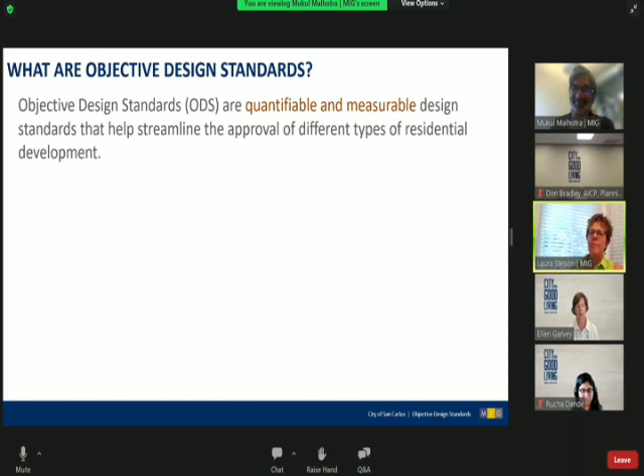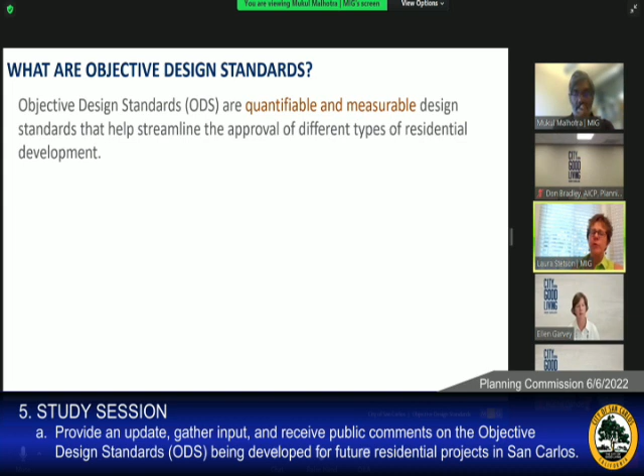So let's talk about what objective design standards are. You might scratch your head if you're a design professional or member of the public involved in design review, thinking how do you quantify and measure design? How do you describe a color, or how windows, roofs, or building materials are treated? That's a tall order, but the objective design standards will create a guide—more than guidelines, standards with some flexibility—for how planners and the public can review a project, and streamline the approval process for different types of residential development. The overarching goal the state is looking for is to create surety in the process of building residential development, because people need housing. There's a housing crisis, and this is one of many laws that has come forward to help address that.

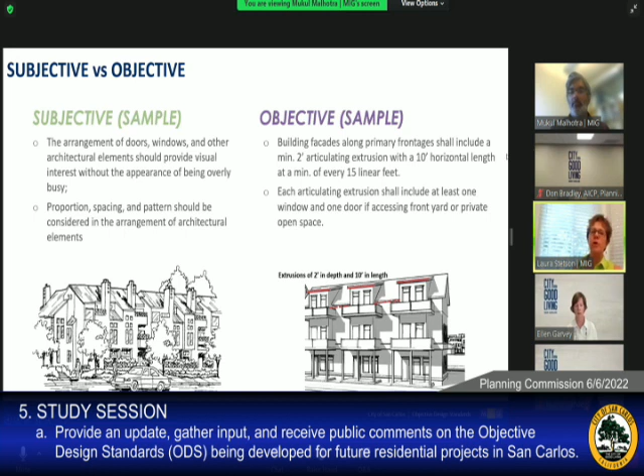It's hard to put objective criteria to design. You might have design guidelines today, like the sample on your left, that talk about the arrangement of doors and windows needing to create visual interest. But what does visual interest mean? It means different things depending on who you ask. If you take that type of standard and apply objective, measurable standards to it, you can see the example on the right—not saying you have to do exactly this, but here are minimum things you have to do to create, for example, articulation in a building facade.

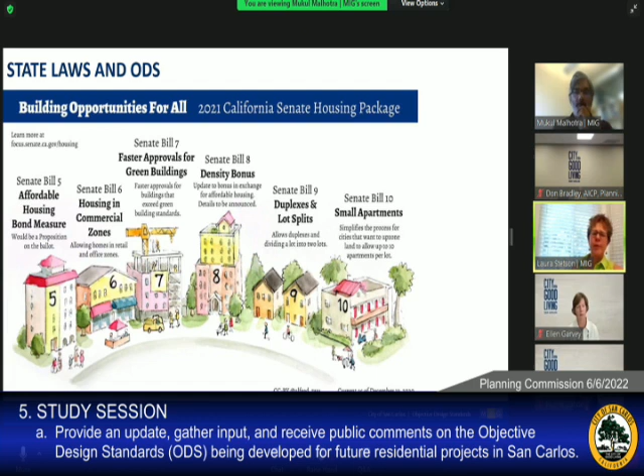I mentioned that there are a lot of state laws that are coming together to guide these objective design standards, one of which we'll talk about this evening is Senate Bill 9, SB 9, which addresses single family homes and the fact that you can now put more than one home on a lot in a single family neighborhood. But there are a bunch of other laws that have moved this forward as well.

Recognizing, of course, that you've got a diversity of single family neighborhoods, first defined by the topography, whether it's in the flatlands or up in the hillsides. There are different things that guide development, as well as maybe the era that different neighborhoods were developed in.

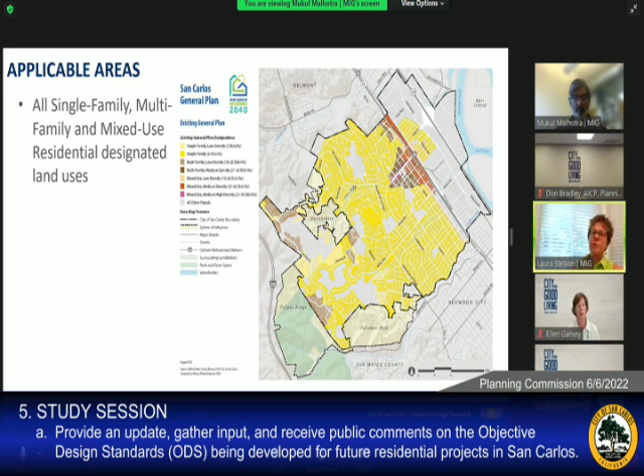There will be two parts, or actually two paths, that the objective design standards create an opportunity for. Let me first talk about how things are done today.

The existing process is: somebody comes in, submits a development project, planning staff looks at it, checks if it complies with the general plan, any applicable specific plan, or the zoning standards in the current zoning code, and it's reviewed by these two bodies, either one or both of you. If it meets all of those standards, as well as some subjective criteria that you might apply, it's approved. Or not — it might be sent back for redesign, or if something's really wrong with it, it might be rejected. I think everybody likes to give somebody a chance to go back and try to fix it before it gets to the finish line.

The new ODS process will simplify things. If a developer comes in and elects to comply with all of the current standards in your code, as well as the new objective design standards, in a very black and white process, planning staff can say yes, it complies — we've got a long checklist, we compare it, it complies. The project will move to the approval process without going through a public hearing or any type of review by the RDRC or the Planning Commission.

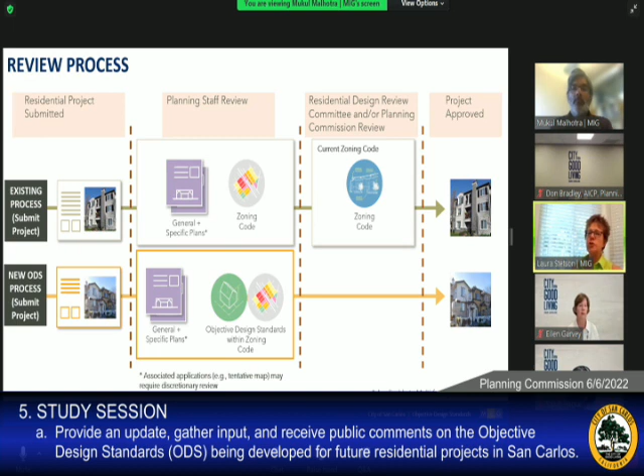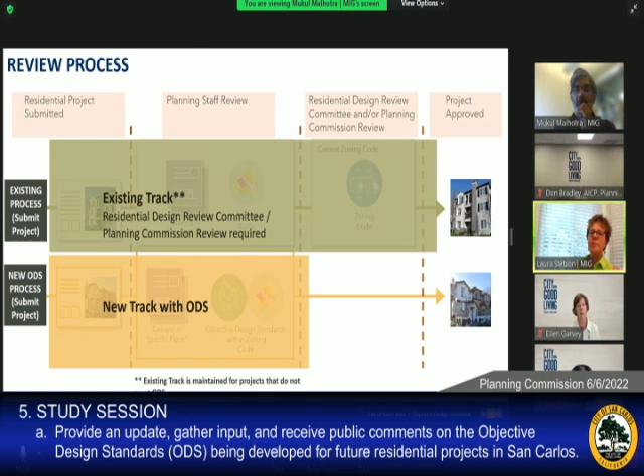That's if a developer or homeowner chooses to comply with the objective design standards. However, there will always be an out if there's something they don't like about the objective design standards that won't allow their project vision to be achieved. That's fine — they can still opt to go through the current process. So this is a choice an applicant makes: do they want something fairly clear with certainty? If they comply with all the objective design standards, that's a faster process than if they choose to vary a little bit from the standards, in which case they'd stay on the current track you have today.

So I'm going to turn the next part of the presentation over to Mukul so he can let you know the questions that we asked to really start discussion in the community about what distinguishes San Carlos's neighborhoods, your single family neighborhoods, and what these objective design standards need to address to ensure those qualities are carried forward. Mukul, I'm going to go off screen and let you take this part. Thanks, Laura.

As Laura said, we heard really good feedback from the community when we did our first workshop on May 4th. In the evening we had about 45 people from the community attend the first workshop — it was a virtual Zoom meeting, but very interactive. Of course, the meeting was recorded, and you can always go to the website, cityofsancarlos.org/designstandards, to see the complete recording of the meeting. But we're presenting today what we asked the community, which is the same questions we want to ask you, committee members and commissioners, and also share what we've heard from the community so far.

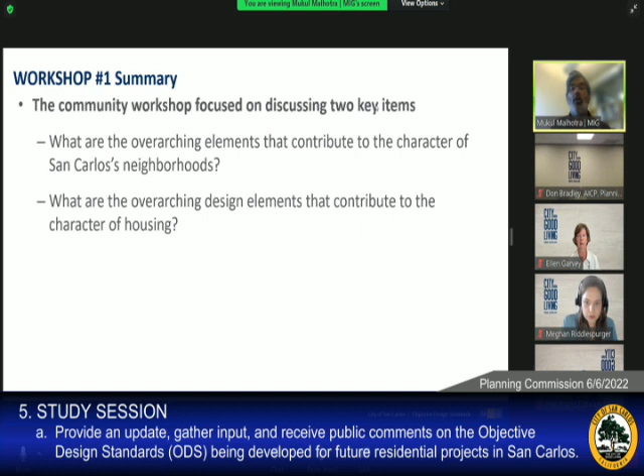The first thing we discussed was what we wanted to learn from the community: what are the overarching elements that contribute to the overall neighborhood character of San Carlos's different neighborhoods, because we want to be very context sensitive. The second question we asked was what overarching design elements contribute to the character of housing we want to see in new developments. Starting with the first question about neighborhood elements, we asked what were the common elements, but also individual elements specific to particular neighborhoods.

Like we heard, some neighborhoods are in the plains, but others are in the hillside. And some are closer to downtown, others are not. So we wanted to hear as much detail and context sensitivity from the community.

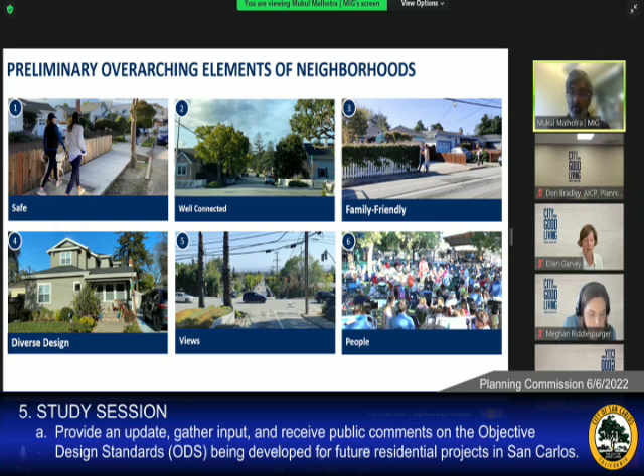In big picture, the community was very clear that there are 6 key values or overarching elements they want to see in all neighborhoods, starting with being safe. Second was being well connected to a wide variety of uses, as well as mobility options. Third was being family friendly — a lot of people talked about how this is actually a family friendly city, and they want the overarching elements to contribute to it.

Similarly, community members spoke eloquently about the need to maintain the diversity of design seen in different neighborhoods. Views were a key critical component, and then people make neighborhoods — that was again something the community was very clear they want to build upon.

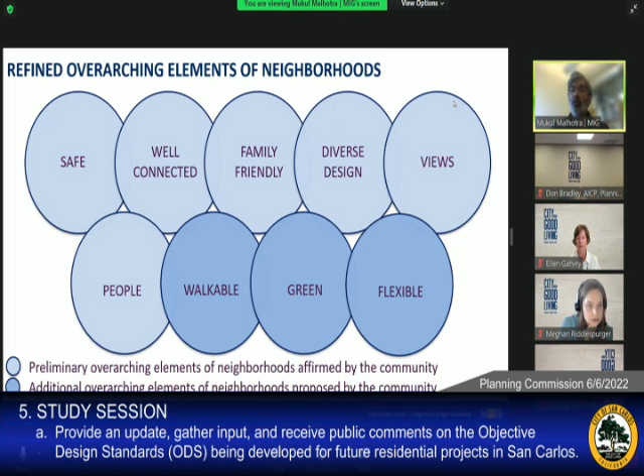In addition to these elements, community members also talked about the need to be walkable, being sustainable and green, and making sure any development or standards created are flexible, allowing for creativity while still providing certainty. So in big picture, we clearly heard that the 6 elements proposed were critical to the community.

Additional emerging elements included creating walkable and continuous sidewalks, providing landscape and trees because they provide important shade and also traffic calming, and ensuring flexible design. Other key things community members talked about included opportunities to address privacy as well as adequate sunlight and ventilation.

With regards to the second part of our discussion with the community, we began to discuss what are the various overarching design elements that should be there, not just in the buildings, but also the open spaces around the buildings, in the private parcels.

The discussion focused on different categories that included tree-lined sidewalks, front yards, porches, entrances, balconies, side as well as backyards, the different shapes and sizes of buildings, as well as the materiality and colors.

Going one by one, the first thing we heard with regards to tree-lined sidewalks was that it was very well received. In fact, it was one of the most important things the community pointed out. They also said trees are important because they provide shade, and it was important to keep in mind to preserve any beautiful mature trees.

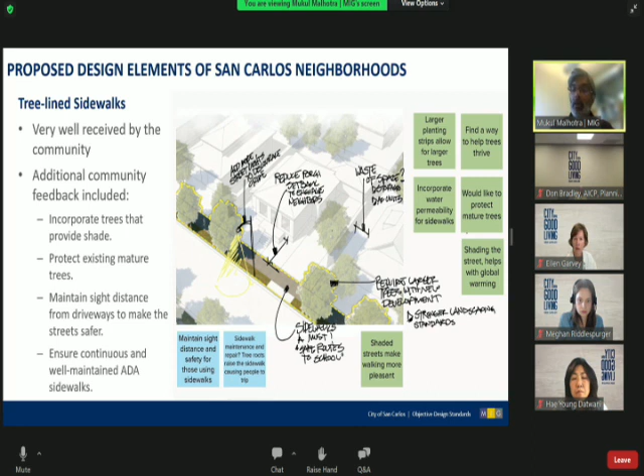The second key thing in our discussion was to talk about front yards. Again, this was very positively received by the community, but they gave us very clear direction in terms of front yards, telling us that yards should be sized to provide opportunity for kids to play, to enable the family-friendly character of neighborhoods that was important to the community, and to ensure landscaping is incorporated to keep the neighborhood attractive.

There was also a lot of great, robust discussion about integrating sustainable methods, be it using low water landscaping or gray water for landscaping. Some of these ideas were drawn out as the discussion happened.

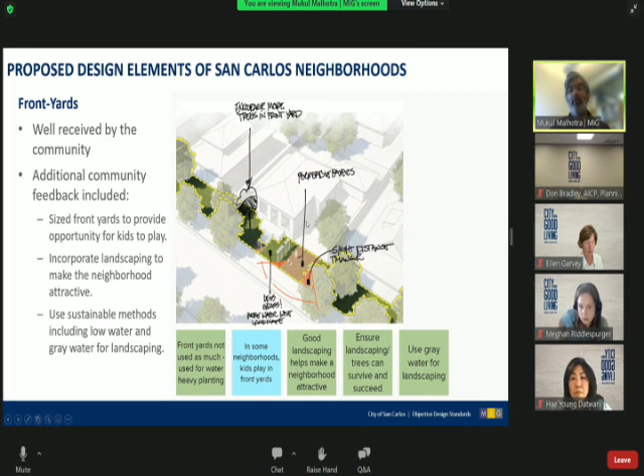The third key element community members discussed was about porches, entrances, and balconies — essentially elements that engage with the front yard and as a result with the street. They provide eyes to the public realm, and community members clearly told us to ensure these design elements were ADA compliant, so people of different mobility needs could use them equally.

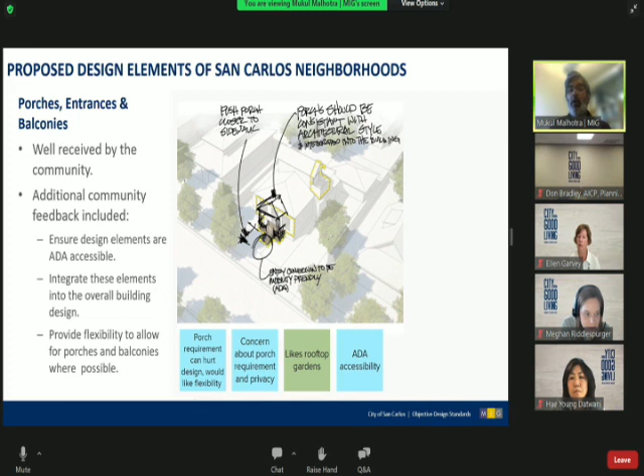They also felt these elements should not be something stuck onto a building, but should be holistically integrated into the overall architecture and design, with flexibility to allow for open amenities like porches and balconies wherever possible — not mandated, but incorporated wherever there's an opportunity. There was also very robust discussion about what kind of side and backyards the community would like to see.

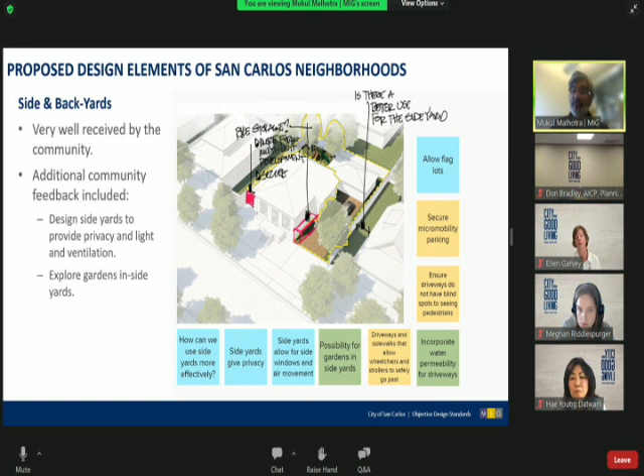Clearly, the community told us that these side yards should provide privacy and light and ventilation to the new development, while still maintaining that for the adjoining developments on the two or three sides of the planned new development. There was a lot of good ideas of exploring gardens in the side yards and not just thinking of it as a landscape buffer. There were also some great ideas about exploring bike storage and making sure these open spaces were being well used by both the new as well as the established residents.

The next community discussion centered around building shape and sizes, and we heard a diversity of comments and feedback from the community. In general, the community talked about maintaining the single family neighborhood look and feel as new development happens in single family lots, so we can still maintain the beautiful, desirable character that exists in some of our neighborhoods, and incorporate step backs and setbacks where needed.

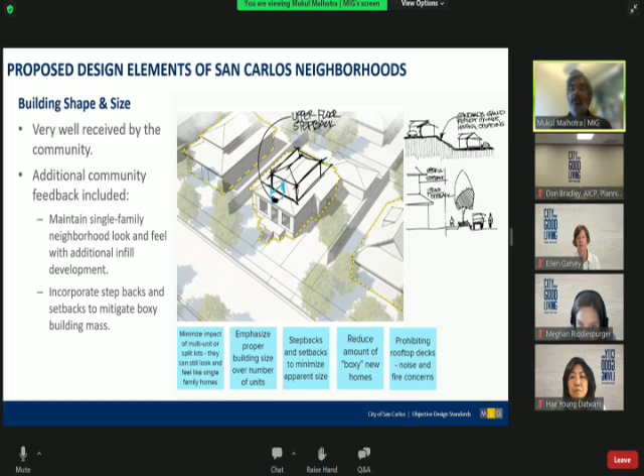There was a fair bit of feedback that sometimes new development can appear boxy, and making sure that the standards take that into account and provide opportunities for the new development to step down and transition to the existing residential development on different sides of the planned development.

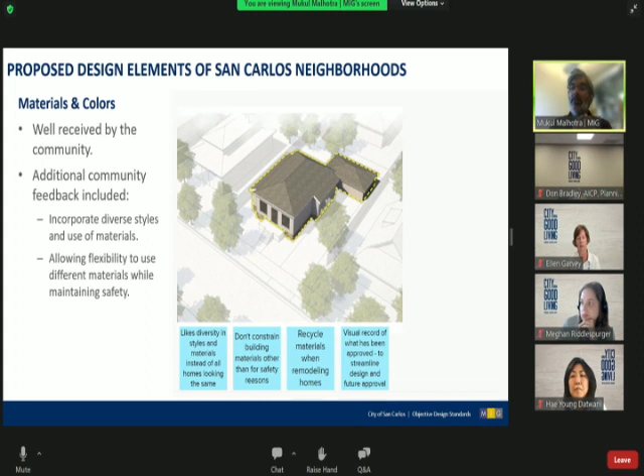One of the last areas the community provided great feedback on was what kind of materials or colors are important. The community asked us to step back and see that one of the key things so beautiful about the neighborhoods is the diversity. So as we think about materials and colors, we incorporate them in the design of these buildings too, while allowing flexibility to use different materials and maintaining safety. There was good feedback about recycling materials and making sure this diversity and eclecticness is maintained in new developments.

Finally, there were general good comments heard across the board, and we'd love to hear from you, committee members and commissioners. In general, people talked about securing micromobility parking for multifamily units. Keep in mind we're talking more about single family here, but they did provide that feedback for multi-family units too. There was also a desire from the community for us to keep in mind that when developing on hillsides, we need to customize development to be responsive to that, balancing the need for roof top deck amenities that some new developments are seeing with considerations for fire, noise, and privacy.

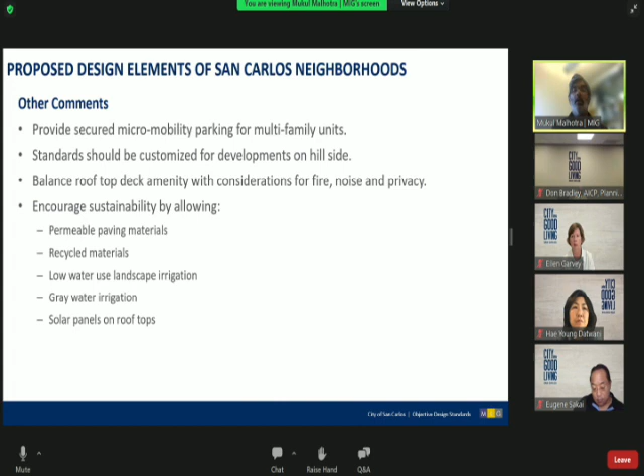Again and again, a common theme across all of these discussion items was to encourage sustainability, whether using different materials like permeable paving or recycled materials, low water landscaping or gray water for irrigation, and allowing opportunities for solar panels on rooftops.

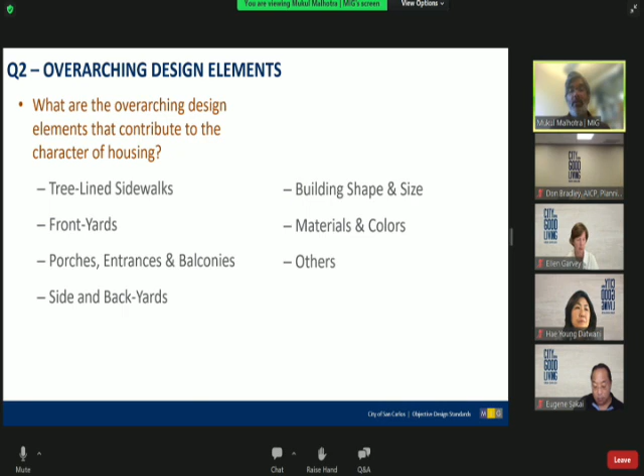So before we go into the interactive discussion, the two questions we'd love your feedback on are: what do you think are the overarching neighborhood elements, be it safety, connectivity, family friendliness, or diversity in design, as well as your feedback on individual building and open space design elements such as tree-lined sidewalks, materials, or colors. But stepping back, I'll give it to the city to provide the summary on Senate Bill SB 9.

Great, thank you Mukul, and good evening. My name is Sajuti and I'm with Community Development. Tonight I'll briefly talk about Senate Bill 9 and gather any feedback, specifically focusing on objective design guidelines as they pertain to new SB 9 units, building on the discussion Mukul already started.

As a reminder, SB 9 state law became effective on January 1st, 2022. To respond in a timely manner, an urgency ordinance was adopted by City Council on January 10th and then extended for 10 months and 15 days on February 14th. The purpose of the urgency ordinance is to impose interim regulations and objective standards for the subdivision and development of SB 9 units.

As a reminder, for lots subdivided under SB 9, the urgency ordinance limits development to 2 units per resulting lot, with a maximum size of 800 square feet for all SB 9 units, with no ADUs or JADUs allowed. For parcels not subdivided under SB 9, the urgency ordinance limits to 4 total units, including 2 primary units, an ADU and a JADU, with a maximum size of 800 square feet for all SB 9 units. As an update, since the interim ordinance was adopted, the city has received no SB 9 applications to date.

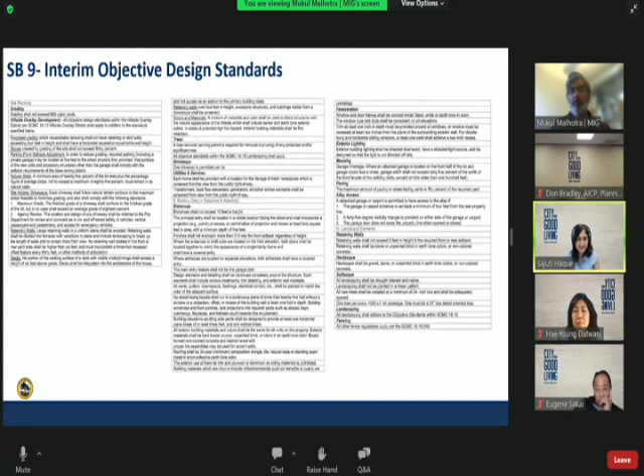Starting on May 4th, we had the community workshop for ODS, where we received a lot of feedback, especially focusing on the single family homes that may and can apply to SB 9 units. Staff also met with the Council Housing Subcommittee on May 19th to discuss the SB 9 project status and get feedback on policy related items.

Today's June 6th, and we're having the study session with RDRC and Planning Commission to get additional feedback on SB 9 objective design standards. Then through June and July, staff will use all the feedback we've received so far to start preparing the permanent ordinance, ensuring we have input from the various stakeholders.

There'll be an opportunity to meet with the Council Housing Subcommittee in August if needed, meaning if there are any major changes to the design guidelines, we'll go back to the Housing Subcommittee to ensure they are informed.

Staff plans to bring the ordinance back to Planning Commission at the end of August for a recommendation to the council. The anticipated first reading of the ordinance is expected to go to council on September 26th and the second reading on October 24th. If all goes according to schedule, the ordinance will become effective on November 24th.

And that's just a quick overview of how SB 9 design guidelines fit into the bigger ODS piece. And with that, I'll hand it back to Meg. Thank you so much.

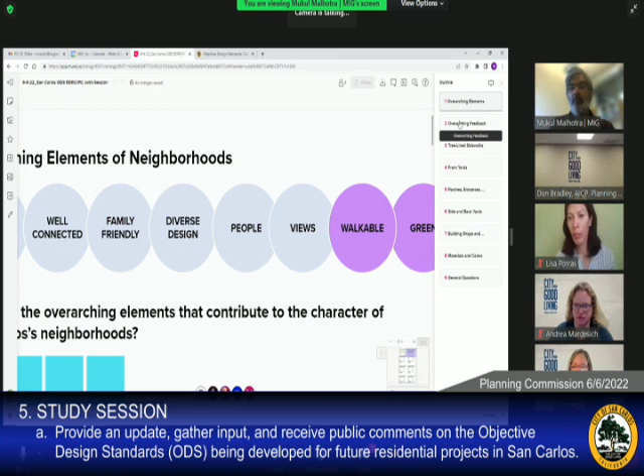I do not see any hands raised on the attendees on Zoom. Are there any attendees on the phone who are raising their hands? Are we able to put up the call number? That would be helpful, thank you.

If Nicole could stop sharing for just a minute. Yeah, if I can share my screen, I can bring up the presentation again. Thank you. So let's see. Great, and so, whoops, I think I'm going to need to, I apologize. I think this is at the end. Let me stop sharing and queue it up accordingly. Give me one minute here. Thank you, Lisa.

Madam Chair, this is Laura Stetson. While she's doing that, I'm looking for some clarification on a comment in Q&A from Ms. Kathy Baird. She says yes to SB 9 units, and I'm assuming she's in favor of SB 9 units. Ms. Baird, if you could confirm that in the Q&A, that would be great, or if you want to be recognized.

I think it was under the answered tab where Kathy first said, I hope we don't keep the 800 square foot limit in the permanent standards for SB 9 units. Thank you, yes, thank you.

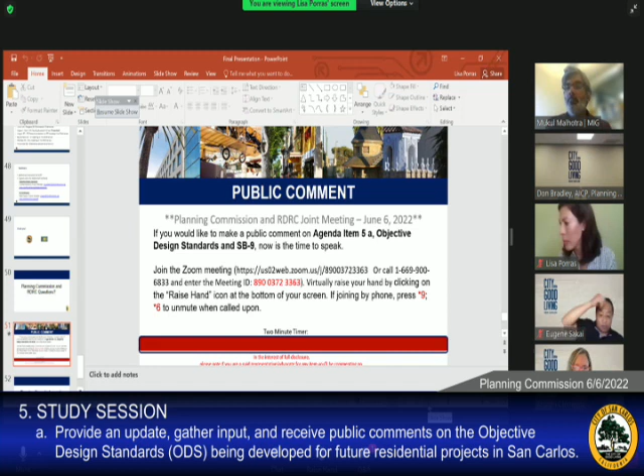This is very difficult to deal with because you're so general. It's very hard to respond to it. When you get more specifics in there, it'll be much easier, like you were starting to do with the SB 9 stuff, but it wasn't enough information for me to respond to. What I suggest, and I think it was suggested previously, is that you need a lot more visuals, photographs of houses you like, buildings you like, things that reflect the community character that we have. If you had more of those and let people start rating them, you might have a much better chance of getting response. Right now I can't respond.

Everything is so general, I have nothing to respond to, really. I can opine on SB9. I agree that an 800 square foot maximum is not correct—it was supposed to be an 800 minimum in the state code. Why not? Can't the units be bigger than that? Take one 3,000 square foot house, split it in half as two duplexes, and you've got two 1,500 square foot units. A lot of other issues like that. I'm looking forward to seeing the SB9 specifics so I can respond to them. But more visuals is what you need—seeing what people like and don't like will help you figure out where to go from here. So thank you.

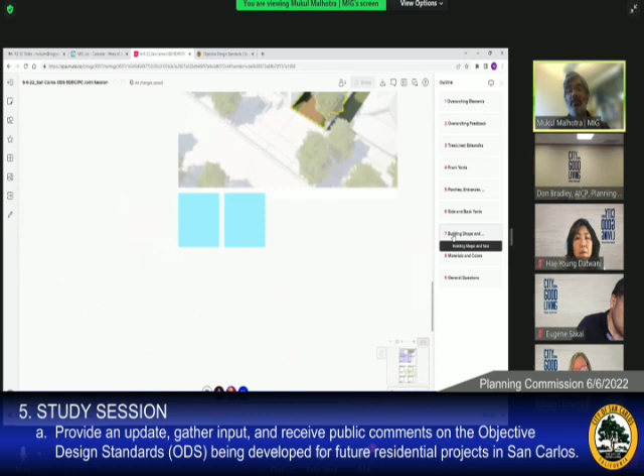The other set of questions has to do with individual building and open space elements, be it tree-lined sidewalks, front yards, different types of entry elements including porches, entrances, balconies, design of side and backyards, what building shapes and sizes should be, and also your feedback on materials and colors, in addition to any other general comments or questions you may have.

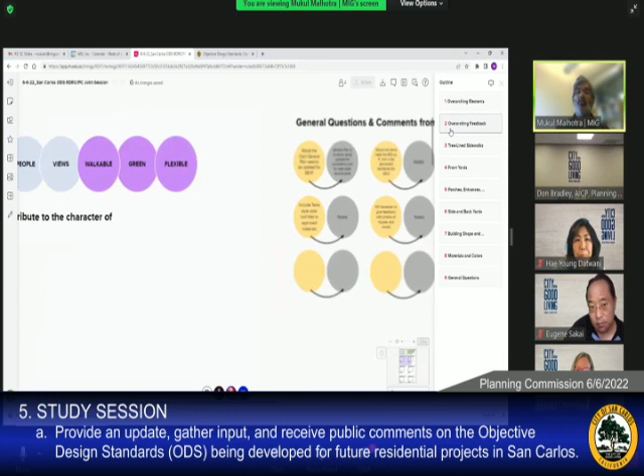So with that, I'm going to go back to the first question, which is to hear your feedback on whether you agree with what we've heard from the community so far in terms of the overarching neighborhood elements, including things such as safety, being well-connected, family-friendly, and so on and so forth.

Great. Who would like to start off? Do we like these priorities? Do we have thoughts about other ones? I see Commissioner Garvey.

Thank you, Chair Clements. I don't have any additional ones to add. For me, if I were to try to rate these, I really like the idea of diverse design, flexibility in design, allowing the homeowner to do a modification or build a home that has meaning to them. And I see that in San Carlos now, and I'd like to see that be able to continue.

I also like the idea of a walkable neighborhood. Many people, some of them with dogs, some of them are just walking. They walk by my house or through the neighborhood every day. I do that too. I really like that idea. So those for me are some of the ones that bubble to the top. Walkable, flexible, diverse design. I would say for me, those are the most important ones.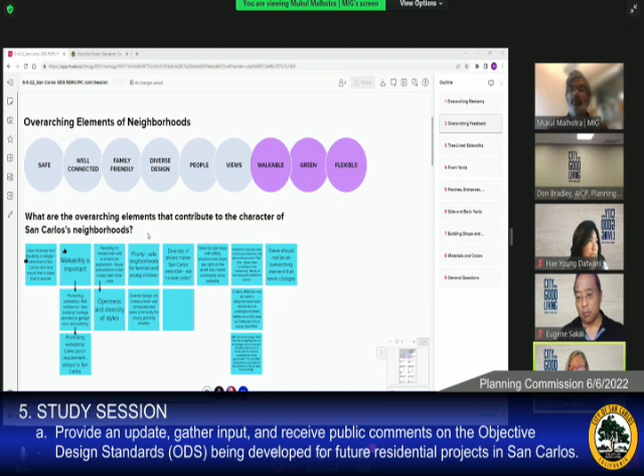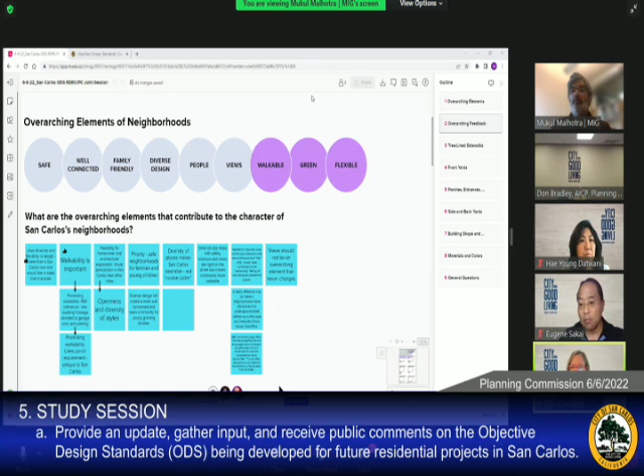David Crabb made a couple of comments about walkability with wide, continuous sidewalks that feel safe, with street trees that are welcoming. Love the street trees. And then undergrounding of street utilities, which I think would be fantastic. I agree wholeheartedly. I actually have a transformer view in my backyard, not my favorite, so I would love to have undergrounding personally. And then there's some more on SB9, so maybe we can come back to that.

Great, so maybe this is an opportunity, if you agree Commissioner, to jump onto the individual comments or design elements, starting with the tree-lined sidewalks some of you have already started to talk about. Any thoughts about having that as an integral part of design standards as this process continues with developing objective design standards? Yeah, I think we've heard that from a couple of people. Again, the other comments were about shade, protection of mature trees, ensuring driver sight lines, and ADA access from the community meeting. Would any commissioners or committee members like to chime in on this?

Oh yes, Commissioner Garvey, please. Oh, thank you, Chair Clements. This may be an opportunity to add on - the use of gray water was a good suggestion made at the last workshop, and it can be really beneficial, not only in landscaping but if people are planting trees. I also want to support the new tree ordinance that was just adopted, and there are many native trees on that list that don't require lots of water. So I support the idea of trees if they are low water and can be, where applicable, watered using gray water. Thank you.

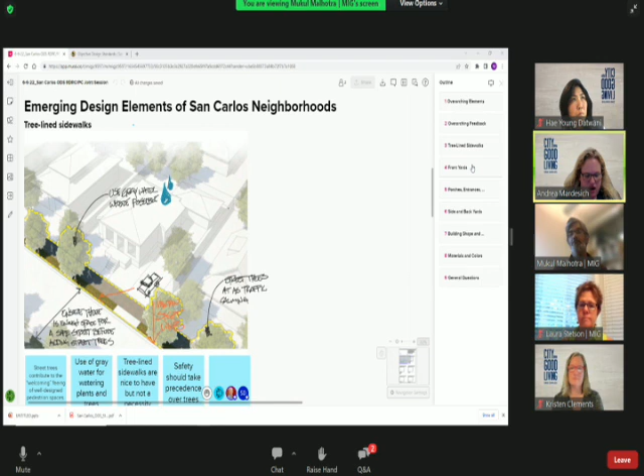Somewhere between the house and the road, somewhere. I'll say again about street trees, because the area is getting hotter every year, I find myself not wanting to go outside if I can't be in shade. So I personally find it more and more important. My trees are doing worse because of the drought, so this is really, for me personally, very important for wanting to be outside.

Thanks. So we are going on to the front yards portion of our show.

Vice Chair Clements, I do see that Commissioner Bradley has his physical hand raised. It's hard to see, but he is waving. I'm having a hard time, his Zoom title is directly across his face and his body, so it's really impossible to see. Sorry about that, Commissioner Bradley. Would you like to comment before we go on?

Yes, please. Just back to details in the yards. The state has said in SB 9, I believe, that we can reduce the side yards and rear yards to 4 feet. People have been complaining when they come to RDRC that 5 feet isn't enough because of privacy, fresh air, and things like that. I noticed a lot of comments from people at workshop number 1 that they wanted to put a garden in their side yard and plant trees and privacy shrubs. You can't do that in 4 feet, even 4 feet and 5 feet on the other side, my God, that's 9 feet. Is that it? And no backyards, you can build up to 4 feet of your rear property line. So is there a way in these design standards that we might be able to get it back to 5 feet instead of 4 feet, or can we resist the state that much? Thank you.

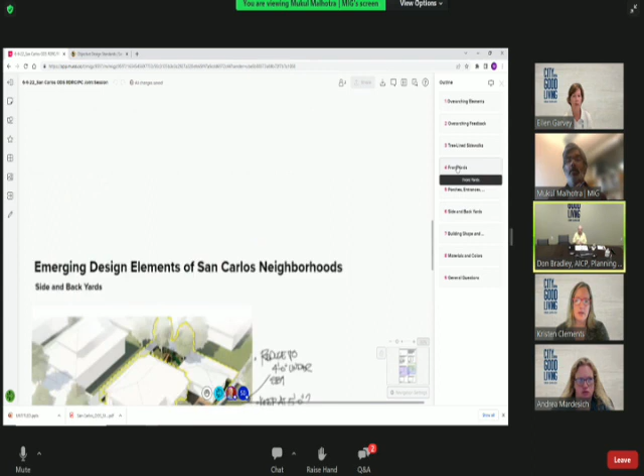I think, great, David, thank you. Make a comment. Thanks, Commissioner.

So talking about front yards, I'll point out in the chat that there's a point about SB 9, that it would result in flag lots more often, and homes would be placed with narrow driveways along the side of the front house back to a second house, so you wouldn't necessarily see that back house much from the front. The visual impact of the additional unit from the street is potentially minimized. So thank you for that, Mr. Crabb.

So as we talk about front yards, gray water irrigation was noted for landscaping in the last item, and that is also very interesting, as are water-wise gardens and plantings. Other things noted in the workshops were front yards sized for kids' play, family-friendly design, maintainable landscapes, sustainable landscaping. Would any commissioners or committee members like to comment further?

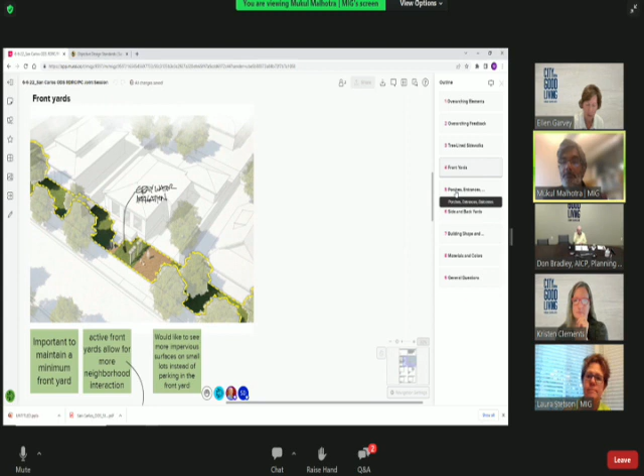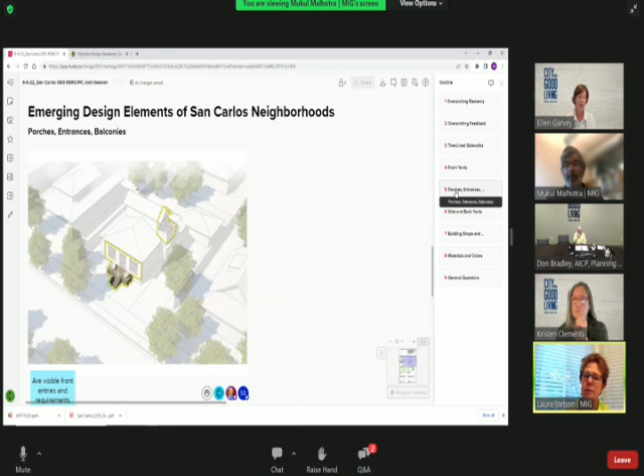We also need to meet the C3 requirements that all new developments require in some ways, not everywhere. C3 being permeability, groundwater recharge, and stormwater capture. Right. And of course, we could use permeable pavers or other materials if somebody needs to park a car in the front.

I have to agree with Commissioner Bradley. It's not desirable necessarily for aesthetics to park in the front yard. However, I do think that sometimes it is a necessity.

For instance, my house has no driveway, so I have a 1-car garage that you enter off of the back alleyway. It's a very common design in many urban areas, and I like it because I don't see garage - when you look at the house, I just see house. Our side yard was too narrow to run the driveway from the front all the way to the backyard.

So it wouldn't fit, therefore I must park on the street. And Don, if I had a collector car like yours, I would have no choice but to park it somehow in my front yard, or somewhere, but anyway, sometimes it's not possible.

Also, I want to add that if I own a home but need to, for financial reasons, rent out a room to someone and do a home share, or build an ADU in the backyard, I might have to allow someone to park in a portion of my front yard so that it will be more marketable. So it's not desirable, but sometimes I think it might be necessary.

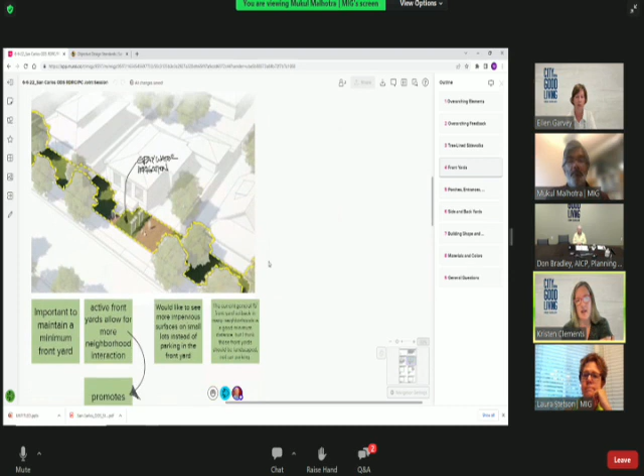And if it's done with permeable pavers, perhaps there's a way we could allow it if it were over to the side, not like plain concrete. I don't know what other communities have done regarding this, because with ADU state laws, I believe you can't say no because there's no parking, and you can't prevent someone from parking in the front in order to service the ADU.

And Ms. Clements, one thing we would want to take a look at in a situation like yours is whether there's any restriction - if you have access to the rear via an alley, do your current codes even allow another curb or a curb cut if there is parking from the rear? That's another consideration we'll look into.

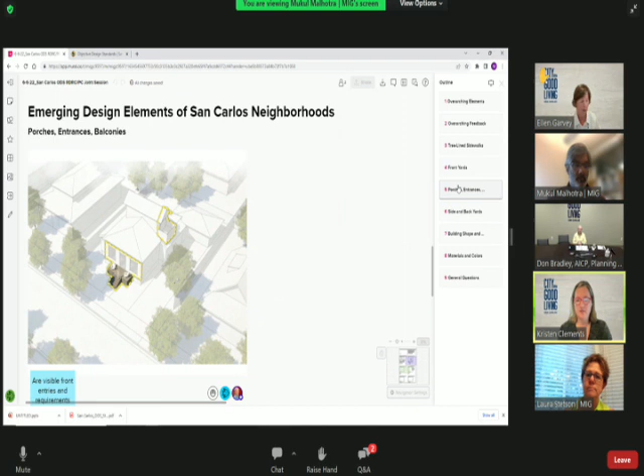Meaning it's not a through lot where you can have access from both sides - there might be a requirement that you can. And I guess one other point is that I don't want to prohibit that kind of design from happening. I want to be able to allow those garages off of a back alleyway or a road behind if the conditions allow. I do think it really adds space to the yard in different ways, and I haven't found it any problem to park on the street, which is where I park, where I live.

So, Commissioner Garvey has her hand up. Well, thank you, Vice Chair Clements. And just to build on that point, at the RDRC we pretty often hear comments from neighbors, especially where there's a home proposed on a narrow street, a tight street that just doesn't have a lot of available parking. There's a concern from the neighbors that if the new homeowners are going to park a lot of cars on the street, that's a concern.

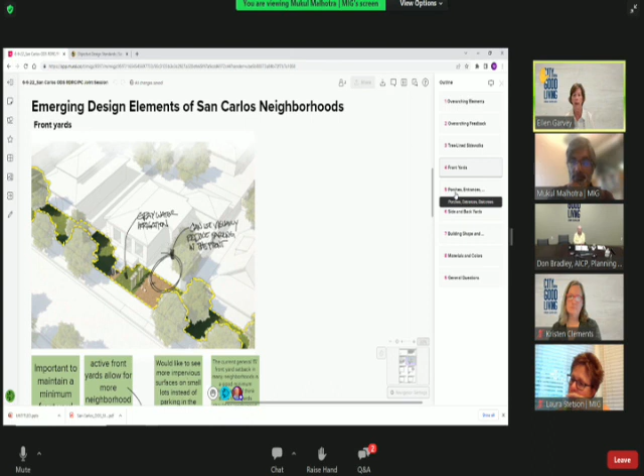So having space to allow them to get 2 cars off the street is generally encouraged by the neighbors. And if the homeowner is able to do it using a permeable surface, then they're able to meet the code. That can be a good compromise in ensuring the new homeowner will get 2 cars off the street because there is sufficient room to park them. So while I like the idea of trees, the reality is that every home, instead of having 1 or 1.5 cars, now has at least 2, and trying to get 2 of them off the street seems a good idea.

I think what that commissioner also brings to the point is inherent flexibility. Think of all our open spaces, they are used differently at different times of the day. During the day, it may be something kids will play on, but in the evening it may be where cars are parked, or you may have a barbecue. So thinking of front yards as flexible, permeable open spaces that serve different needs is something we can definitely keep into account.

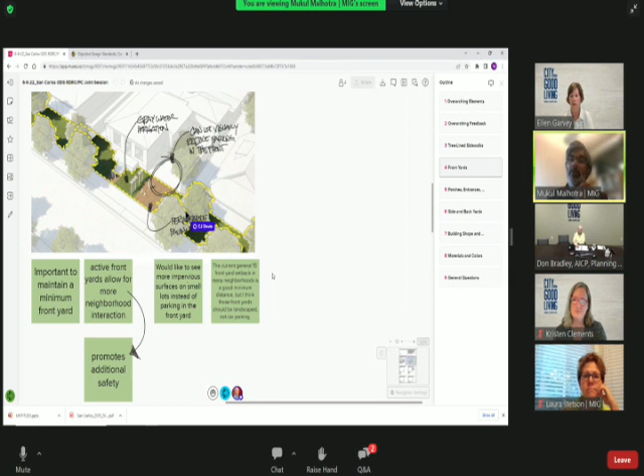I am going to request, in the interest of time, that we go ahead with the discussion on porches and entrances and balconies and other similar elements. I think we did hear from the initial questions and comments that it's something distinctive that the city of San Carlos has a porch requirement. So thoughts on that?

Yes, Committee Member Datwani. The porch area in front of the entrance, is it required that it needs to be covered? I read the guidelines, but I didn't see that in there. Does the entire porch need to be covered?

So I can go ahead and answer that. Currently, our code requires at least a 40 square foot porch. That could be either a projection or recessed. So that does most of the time require some sort of roof covering. There is, however, an exception to that, like if it doesn't match with the design and there's some other welcoming entry feature, like landscaping or something like that. But the intent of it really is to have this focal point that's the entrance of the house. So I would say, 9 times out of 10, yes, there's a roof and it's meeting this numerical requirement.

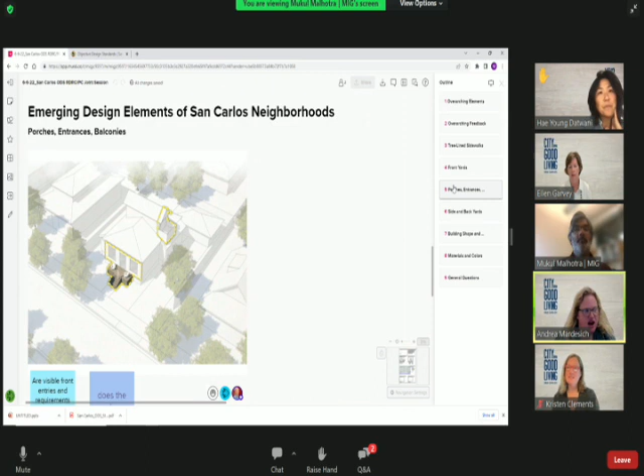My next question is, can you enclose the front porch? So a couple of things. We would currently count that under our code as floor area, so it would go towards our maximum floor area calculations and all of that. If a porch were fully enclosed, I don't think we would then count it as a porch. I think there might be some architectural styles with enclosed porches - we haven't really seen that too much, but that's definitely something that could be looked at. I think the practice though has been to count those as living area, even if it's not necessarily habitable.

Okay, I guess my question is leading to my comment about loving the diversity of the architecture and the flexibility that we're allowed. If the entrances are required to be a certain, specific way, and the porches are defined in a very specific way, that maybe would take away from the creativity of other designers and architects. That was my only comment.

Thank you for that. Other commissioners or committee members?

I have one quick comment, which is to the extent that the porch is an indication of eyes to the street and a welcoming entryway, I also agree with Committee Member Datwani. For instance, we have a courtyard out front, very prevalent and very common in the Mediterranean style, with a little covered entryway. If for some reason this had been built with no covering on the entryway, just opening to a courtyard, I would also think that would serve many of the same purposes as a porch would. So I would suggest that might be a reasonable alternative as well.

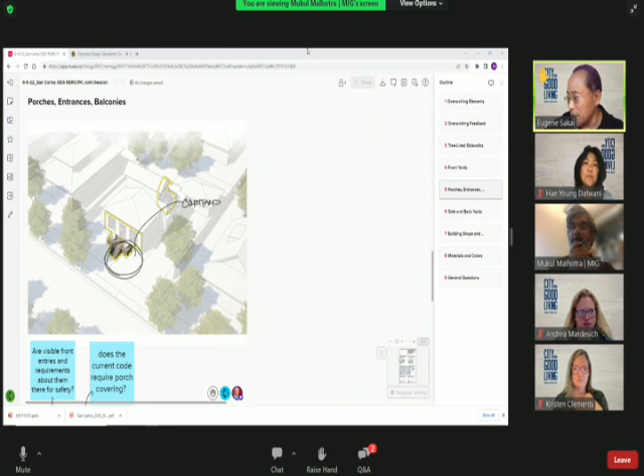Committee member Sakai. Thank you. My question on the porches is not related to this specific page, but rather on the draft objective standards. I think I noticed there was a restriction on, let's see, I think it's on packet page 23, near the top, where it talks about entrances shall not exceed 10 feet in height.

And I think that might be overly restrictive with regard to porches. If you consider that the plate height of a porch would need to be at least 8 feet tall, and probably at least 1 foot above grade, that doesn't leave really any room for roof slope below that 10-foot height. So I know that would be a challenge to design a traditional looking porch with only a 10-foot maximum height. So I think the idea of porches is great as long as the latitude is provided to design a nice one.

We can definitely look into that and make sure that is addressed.

Thank you for that. Do you have any other comments, Eugene? I actually have probably about a dozen to 15 other comments along those specific lines on packet pages 22 through 24, but I'm just not sure if this is the right forum in which to air those, because they're very specific and small, more kind of thinking from an architect's perspective, to my point earlier about encouraging good design while being flexible in that encouragement, so that latitude is afforded to homeowners and architects to do good design.

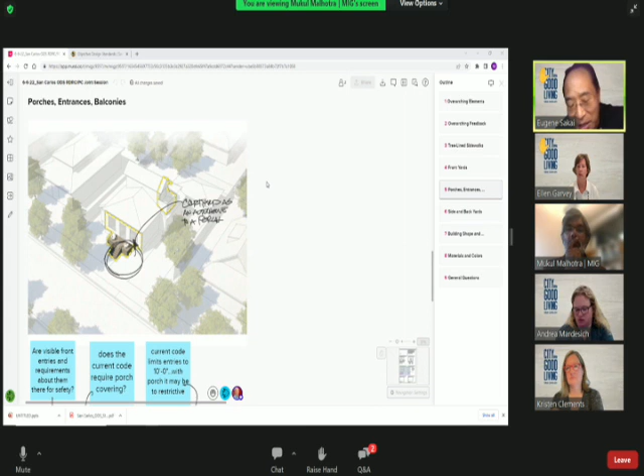I was part of an earlier joint discussion with the Planning Commission where we started discussing this very issue, and I think one of the comments was, how do we encourage densification of neighborhoods in an orderly way? I fear that the tact taken here is one where we're not going to see any SB9 application, simply because you can do a larger building under the current RS6 and RS3 zoning with this 800 square foot de facto restriction. So there's a major economic disincentive to use SB9, similar to what anti-growth cities such as Los Altos Hills and Woodside and other jurisdictions have put in place, which I think goes against the spirit and intent of SB9 in particular.

Because, as you pointed out in your staff report, you've had 12 to 15 inquiries about SB9 projects and no applications as yet. Quite frankly, if I owned a property in San Carlos or was an architect for a client in San Carlos, I'd say this is not the way to go, because you're not promoting the highest and best use of your land due to the square footage restrictions. I think this is great that we're doing this, but I really wonder, after these standards are implemented, are we ever going to see any SB9 applications, unless the state comes down on San Carlos and says, you're not implementing SB9 the way it was intended, so here you go, we're going to rewrite your ordinance for you. So that's my little soapbox diatribe on the events of this evening.

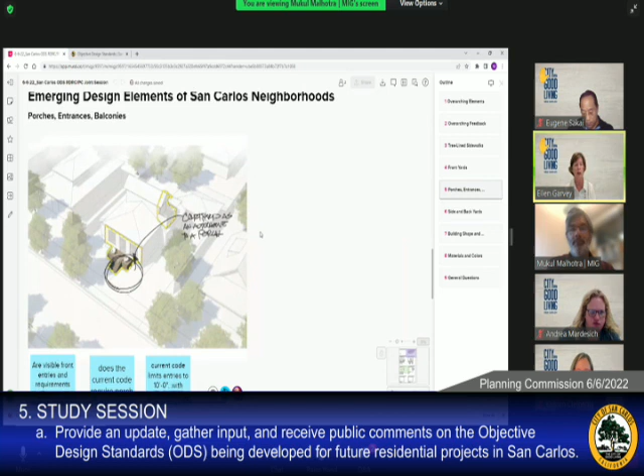I wanted to echo and support the comment made by Eugene regarding porch heights. One thing I've heard a fair amount of in my year on the RDRC is a de-emphasis on garages. When you de-emphasize the garage by shrinking it from a 2-car to a 1-car, the focus shifts somewhere else. I've noticed it shifting more to the front door - the door size, materials, design, side lights, and the porch. Since that has replaced the garage as the focal point of the front of the house, it's important that it be scaled right so it physically is the focal point. So Eugene's comment is well taken, that a little more height might help shift everyone's emphasis away from the garage to another part of the home.

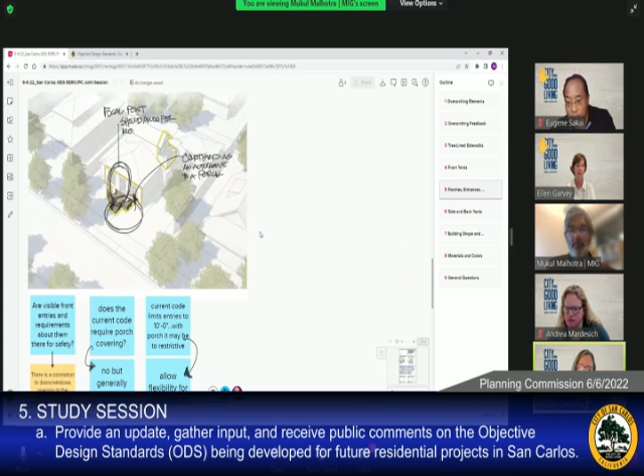Thank you for that. We're continuing to get comments in the chat, and I'll ask MIG to make note of the comments as they put the mural board together. I know this is a difficult item, as the commenter said, to know everything you'd like to say early on as a member of the public. So we're happy to take feedback this way as the thoughts come. Thank you to MIG and staff for incorporating that into the feedback.

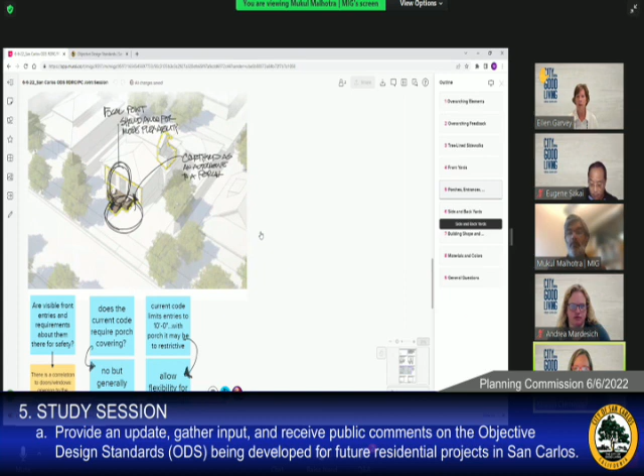I think it's time to move on to the next topic. Yes, please, thank you. And we're talking about side and backyards. So some notes here from both comments in the chat and other items people have already noted this evening. Would anyone like to comment about that - side and backyards?

Privacy, light, ventilation, well-used gardens, secured micromobility storage - is that what I heard from the community meeting citations? Yes. Good, that means a place to put your bike, or your scooter, that will not get stolen, which we see on Nextdoor in different neighborhoods in different cities. Sure, not uncommon.

Any thoughts on side yards or even backyards? I know we also heard from a lot of community members the need to have a fine balancing act between the desire to create privacy for the new development, but also respect the privacy of the adjoining development where possible. And there was a lot of talk about trying to ensure there is light and ventilation, both for the new development as well as maintaining it for the adjoining established development.

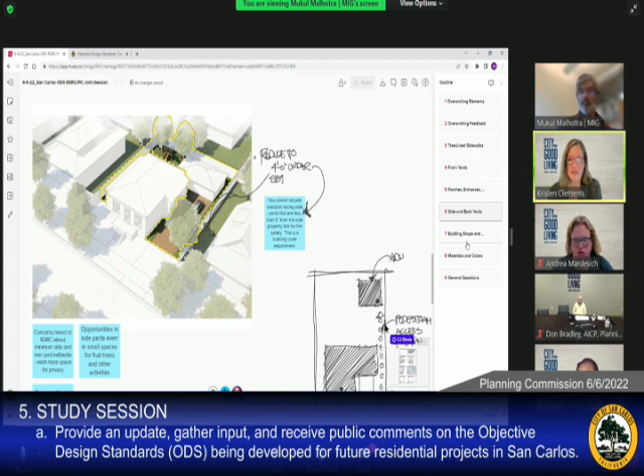I don't see any other hands. So with that, and Don, I'm sorry, Commissioner Bradley's not waving at us, so that's fine. Let's move on to the next one.

This has got to do more with building shape and size. There was very robust community feedback on this. In general, people talked about maintaining the single family neighborhood look and feel with additional infill development, making sure new developments were not boxy, but incorporated step-backs, transitioning to existing adjoining single family development, minimizing the impact of multi-unit or split lots, and emphasizing the right scale and size over the number of units. There was also discussion about prohibiting rooftop decks, keeping in mind noise and fire concerns.

Thank you for that summary. Commissioner Garvey? Thank you, Vice Chair Clements. Just a couple comments about setbacks. At the RDRC meetings, there are oftentimes very robust and sometimes even tense discussions between the homeowner and their proposed project and adjoining neighbors. The use of setbacks has been really important to try to minimize the massiveness that some houses have.

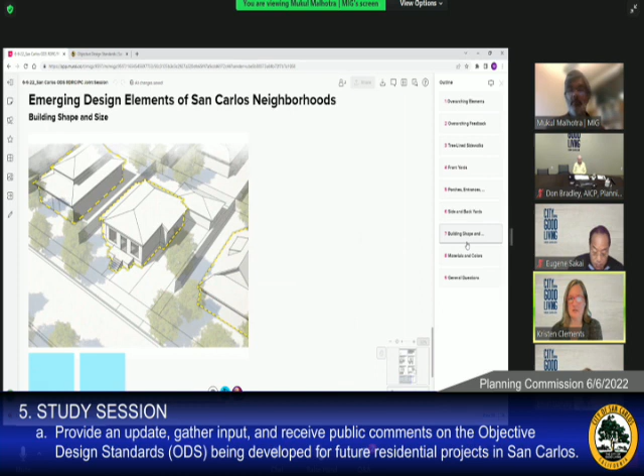Thank you, Commissioner. And I see a comment in the chat about the importance of rooftop solar and making sure that ability is not impeded, and I would second that importance. I know a lot of homes in our area rate very highly for rooftop solar capacity, and I think it'll be more important for people to rely on their own photovoltaics if we have more outages. So I'd second that desire, and I think setbacks do help with that, casting a little bit less shade.

Any other comments on building shape and size?

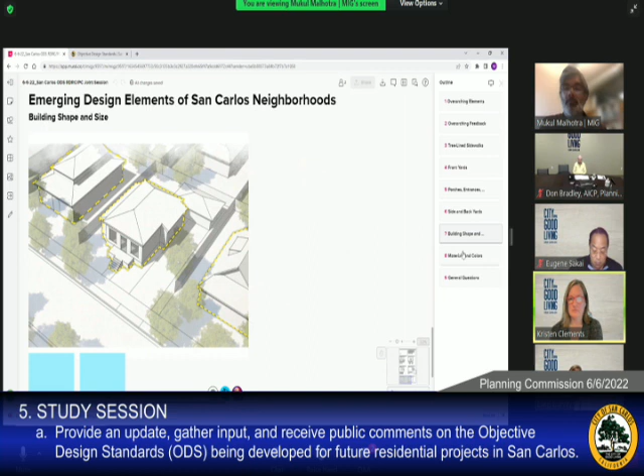Okay, moving on. Materials and colors. Include new Tesla and solar roof materials.

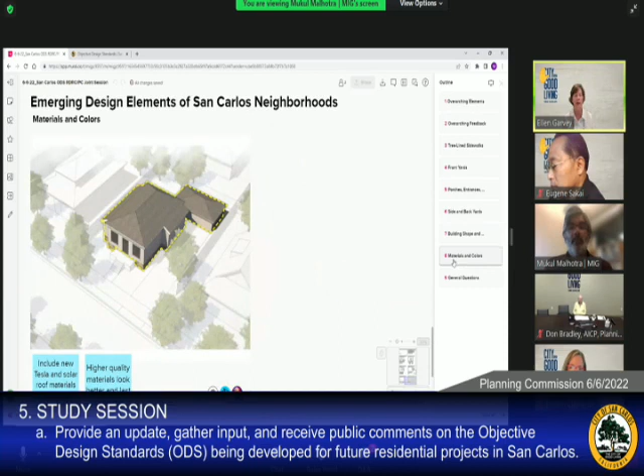I guess if I had to put it succinctly, I'd say higher quality materials look better and last longer. You can really tell when someone wants to use an inferior material. What's really encouraging is that what we see at the RDRC, the vast majority of people are using high quality materials, beautiful diversity, high quality materials, and that's just been wonderful to see.

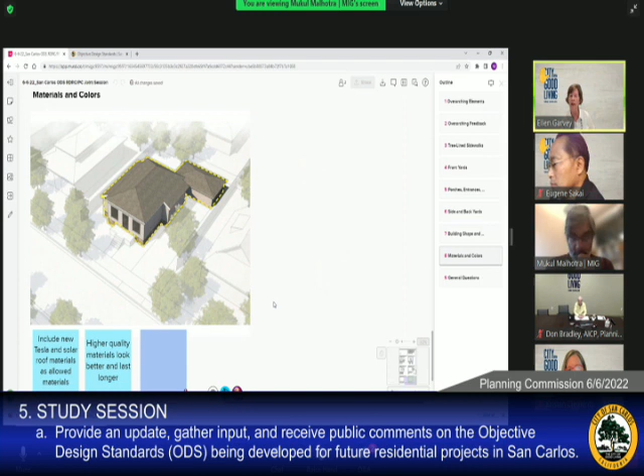And in the one or two times when folks have decided they wanted to use something cheaper, I think they've gone back and done a little redesign once they realized how much better it all will look if they just spent a little bit more money on one or two elements that weren't really up to speed. So I wholeheartedly support quality materials in the building.

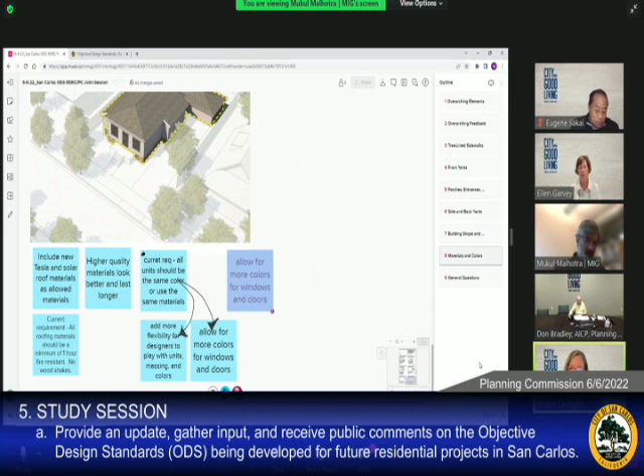I want to really agree with Committee Member Sakai. I think the idea that we want a welcoming and diverse community is really hampered by dictating colors and materials. As a homeowner, to the extent this addresses SB 9, there are a lot of options out there for ADUs that aren't stick built, and some are incredibly attractive, even if they don't look exactly like my home. If I or a design professional I hired felt it was compatible with my home, even if not a carbon copy, I would want the latitude to do what I want on my own property. I don't live with an HOA, and part of the benefit is having more latitude about what to do with my property.

I know, per Andrea's comment, it's hard with your hat on to write that. But I do think to promote recycled materials... we're close to San Francisco and other cities with turn-of-the-century Victorians, traditionally painted all kinds of crazy colors. I would love to see some of those colors in San Carlos, maybe not bright pink, but there are palettes historically appropriate for 1890s buildings, and we have some of those buildings here. I really don't want everything to turn into lookalikes in earth tones. That said, I am painting my house beige since it's Mediterranean, but if I had a Victorian, I would not be. So those are my thoughts.

Would anyone else like to comment? But you do want the opportunity or flexibility. And I want to stress, as an architect, I think what I'm hearing a lot of you saying is that objective design standards should not be a race to the bottom. They should be a race to the top, encouraging or maximizing creativity among designers while still balancing and respecting the overall neighborhood character.

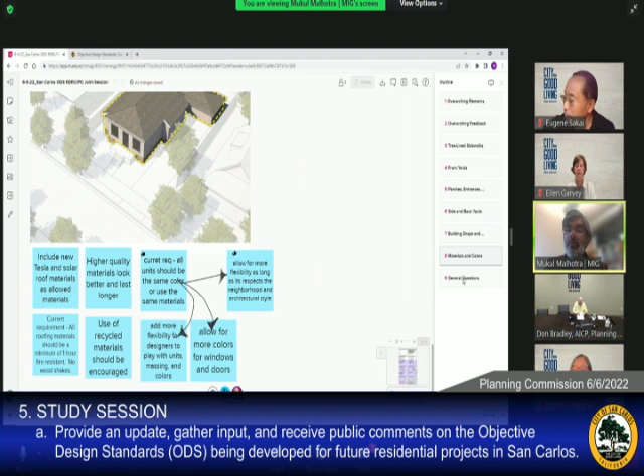Are there any other general comments we've missed in these six different categories of more specific design elements of building and open spaces that folks have? I know we took some of these questions into account, especially with regards to SB 9, but are there any other thoughts or comments before we go into next steps?

I just have a clarifying question. So again, this is for single family standards, although that would be used as well in the context of an SB9 creation, if you will, correct? So for instance, comments about duplexes or triplexes would be another day? That would be in the more multifamily development conversation. But we will be doing community workshops, surveys as well, coming to you in a similar format to have that more detailed discussion. Thank you.

I see Committee Member Sakai with his hand up.

Thanks, Chair Clements. So if these are the single family objective standards, then where are the development standards, or how do the development standards work in parallel with these? Are these in addition to the kind of things that are codified in RS6 and RS3 zoning districts, such as height limit, floor area, et cetera? Okay, so these are on top of those? Yes, they complement those. Okay, I guess that answers my question.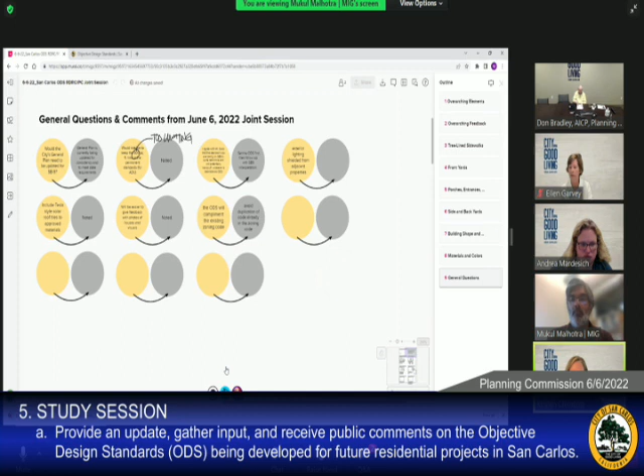Great, I turn it back to staff and MIG. So we briefly wanted to talk about next steps, and I will cue that in so Laura can walk us through the next steps we have with regards to this project. I will share my screen.

Thanks, Nicole. While you're pulling that up, I think the biggest news is the next step is going to be a survey, and listening to the discussion this evening gave us some really great ideas on how to tweak the survey we've started to put together to ask more specific questions. Mr. Crabb, who had to leave the meeting, mentioned at the outset that it would be helpful to react to pictures rather than words when talking about design. We started at a very high level, but this evening you've expressed a lot of things you'd like us to address as part of the objective design standards, and we'd like to get additional community feedback on that. Thank you for sharing those.

So the community survey is scheduled to run through June and July. It's part of the ongoing sessions we'll continue to have to reach out to folks, and we'll come back with the emerging standards a little later this summer so we can share what has been developed on a preliminary basis based on what we've heard this evening, particularly regarding your comments on SB9. As Andrea said at the beginning, we were looking at those as two different things this evening, but they are certainly intertwined. The comments you had on SB9 were very informative, and we'll take them into account when looking at the objective design standards for single family homes, because eventually they will apply.